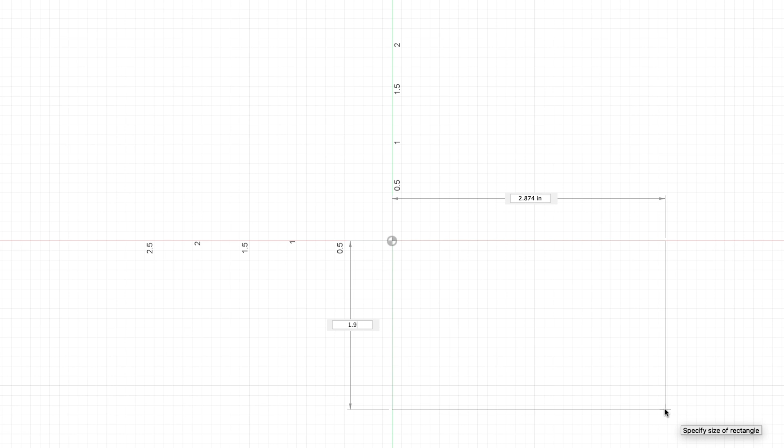Okay, let's get started. First, let's make sure we're in the design workspace, then create a sketch. I'll choose the top plane and do a 2-point rectangle. Create, rectangle, 2-point rectangle. I'll click here, drag down and to the right, type in 1.95, tab, 4.375, enter. Now I'll go to create line.

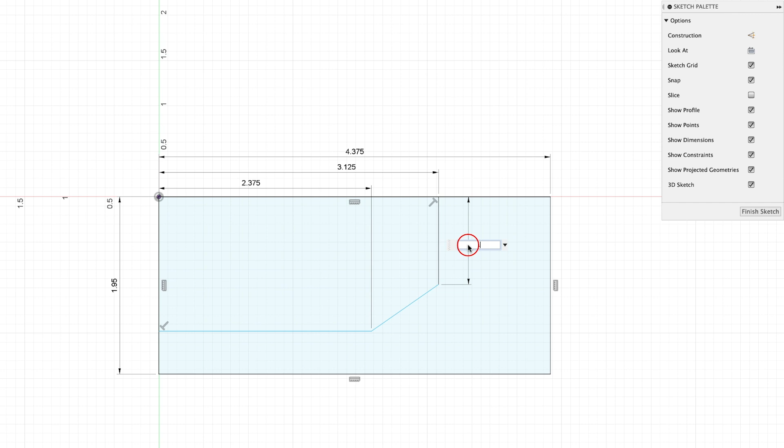I'll click right here, drag this over like this and then like that. I'll press D for dimension. From here to here, 3.125. From here to that point, 2.375, enter. From here to here, 0.475. From here to here, 1.2, enter.

Let's go up to modify and select break. We'll touch this line and see it break right there where the red X is. I'll go ahead and click, then press escape.

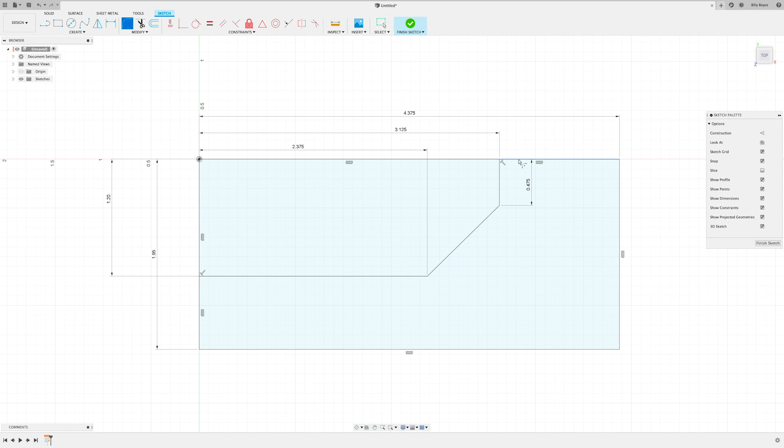Now we can go to modify, fillet. I'll go here and here, type in 0.1. Now here, here, and here. I'll press enter.

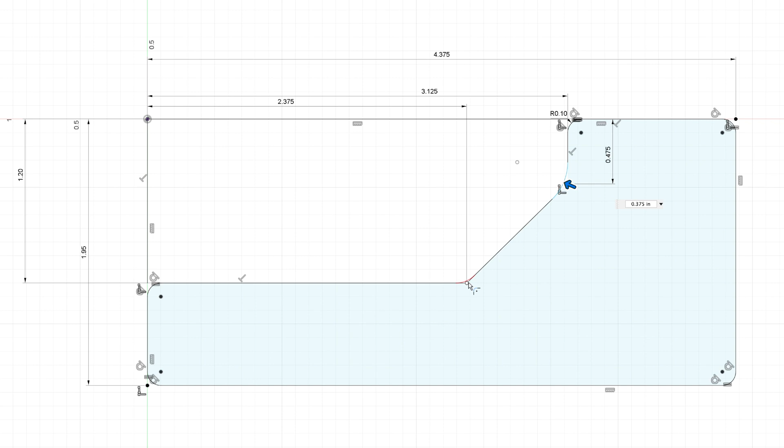I'll come up to fillet, modify, fillet again. Click right here, that's a radius of 0.375. Then also this one. Now we can press enter and we look good.

Let's right click, press pull. I'll select that right there and say minus 0.750 and enter. That finishes off sheet 1 of 3. Now we move on to sheet 2 of 3, where we'll do the counter bored through holes.

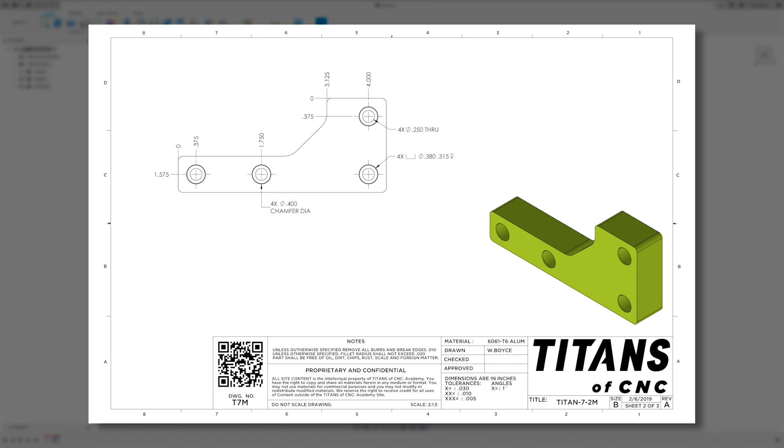We come up to create sketch, choose that top plane, and start off with some points. Create, point. I'll drop 4 points down and hit escape. I'll get all these in line with each other so we can do as few dimensions as possible.

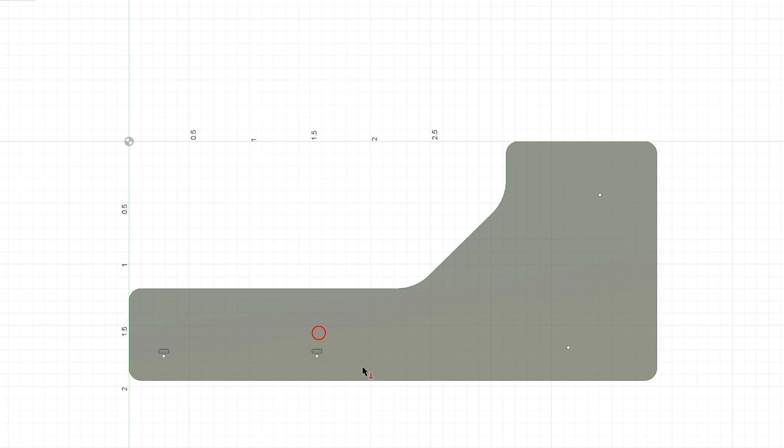I'll click that one, this one with that one, this one with that one, and this one with that one. Now press escape and D for dimension. I'll dimension from this point right here, from there to here, 0.375, enter, from here to here, 1.750, enter, from here to here, 4.

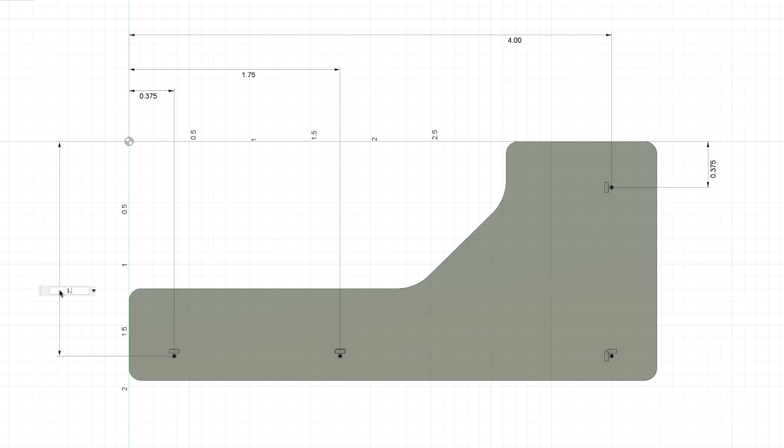Now we'll do this one again, 0.375, enter, and then we'll only have to do this one here, 1.575, enter, and that looks good. So we'll go ahead and finish the sketch.

Now we can come up to create hole. I'll click all 4 of the holes. We should have 4 points selected. We're going to set it to a distance. Hole type, we'll do a counter bore. Hole tap type is just going to be a through hole. Drill point doesn't really matter, we can keep it at flat. That way we go 750, we make it through.

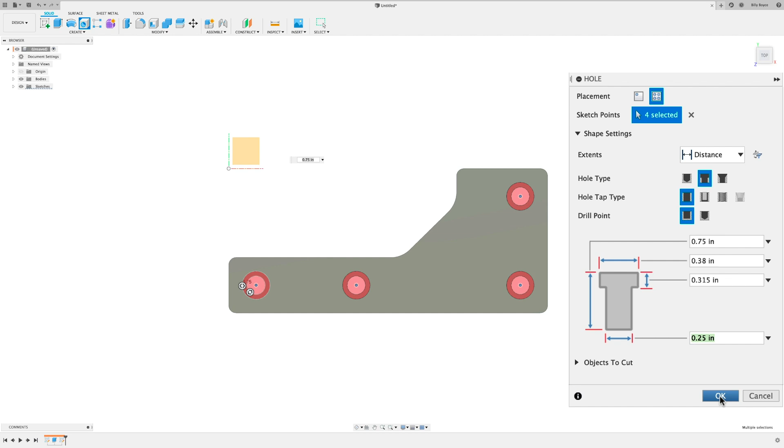Let's go through these settings. We'll go 750 deep. The counter bore is 380 and it's 315 deep. That's this one here, and then that's going to be a 1/4 inch through hole. We can say okay, and there we go. That finishes off sheet 2 of 3.

Now we move on to the last sheet, 3 of 3. Let's get started. We go up to create sketch, click that top surface, press O for offset, or come up to modify offset. I'll select the edge and type in 0.125. It's going the wrong direction. I can say minus, or hit flip. Now I'll say OK.

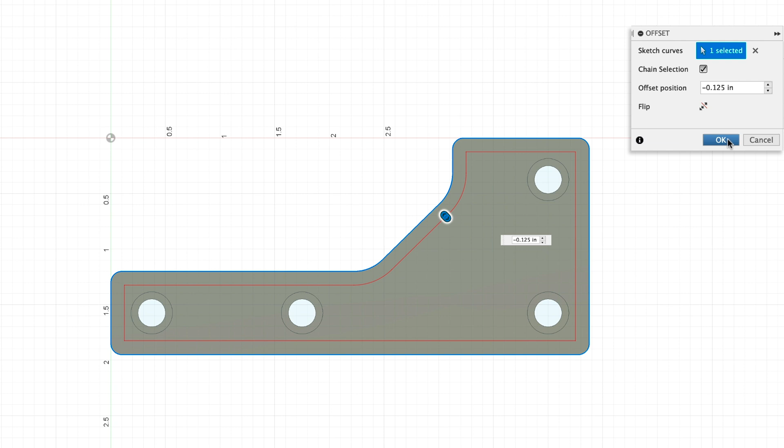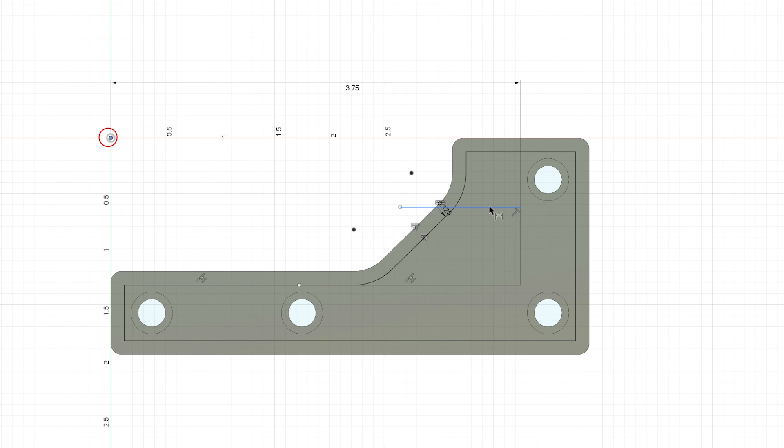I'll come over to create line and do something like this. I'll straighten that out with constraints, saying collinear this with that. Everything else looks nice and square. So we'll press D for dimension. We'll go from here to here and set this dimension at 3.75. Go from here to here, we have a 0.625.

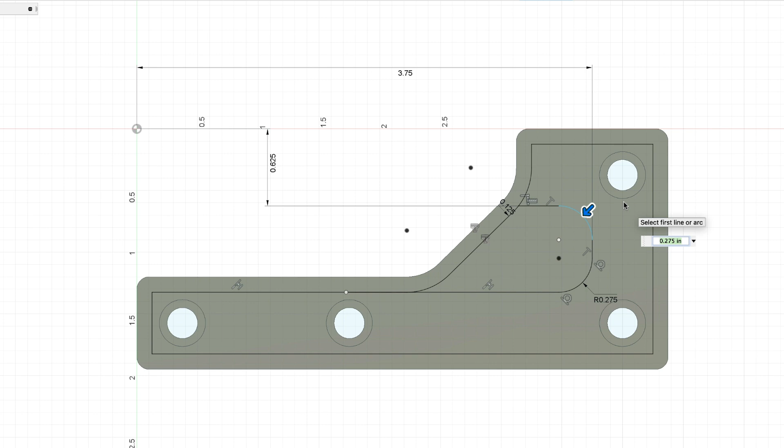Now we come up to modify trim, go ahead and trim that off. Let's add some fillets. We'll go modify fillet. We have a 275 corner, so 0.275 there and here. I'll press enter. Now let's do the extrusion. We'll right click, press pull, select that and this, say minus 0.25, enter.

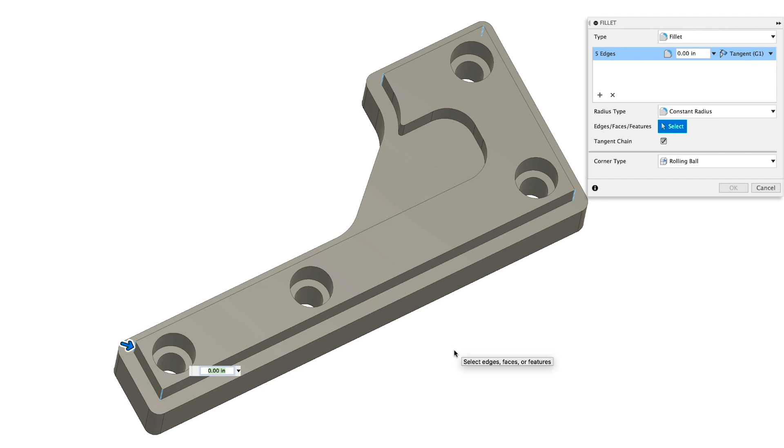Now let's add some more fillets. We'll go modify fillet. This one right here is different than the rest, so let's do that first, 0.025, enter. Now we'll go modify fillet and do the other corners, those are 0.1, enter.

That looks good. Now we're going to mirror this cut and those fillets and everything. First we need to create a construction plane to mirror on. We'll go construct, mid plane, choose the top surface and the bottom, and it'll put that right in the middle. We say OK.

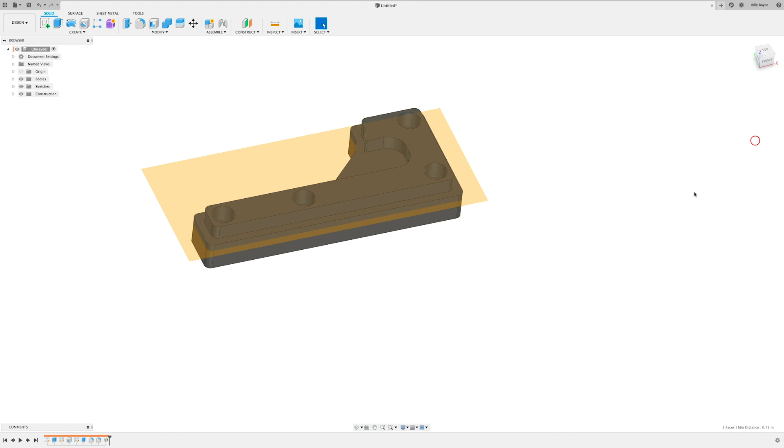Now we're going to go create mirror. I'll select the cut down here and the fillets. Now I'll say select my mirror plane, I will choose the one we just created and say OK. Now I'll come over here and turn that off.

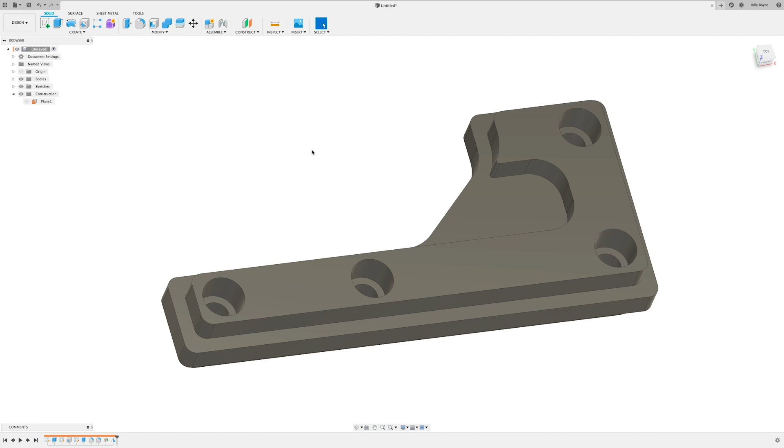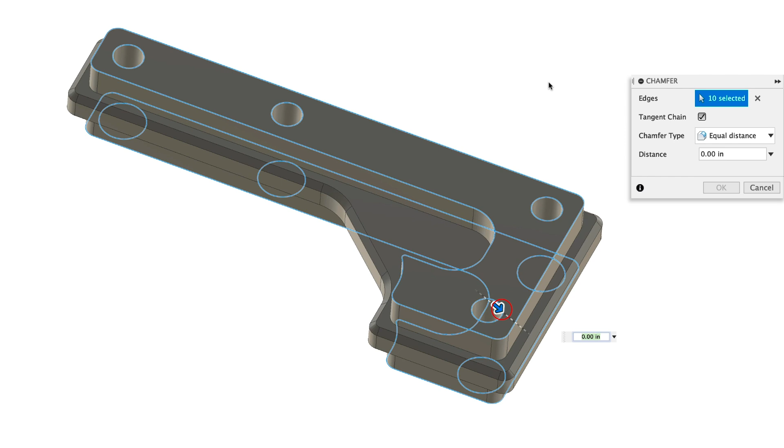And there we go. The only thing we need to do now is deburr. We'll go modify chamfer, do these two right here at 0.05, enter. We can right click, repeat chamfer, and select the top of the counterbore, the top edge, the bottom edge, and the bottom of the through holes. We'll type in 0.01 and enter. And that finishes off the TITAN 7M.